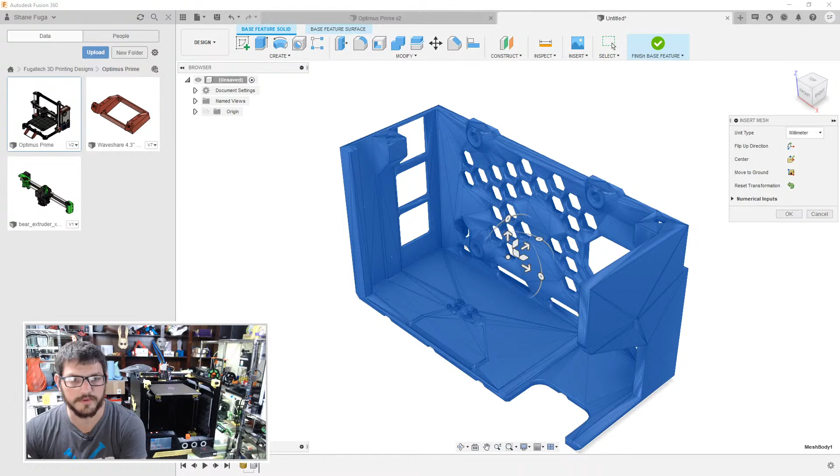So we'll go here, we're gonna move me, like that, there we go. See if we can get these imported properly. I'm kind of going to assemble them, and then I'm able to pull them into my master model. So for looks and things like that, we're going to have to clean these up a little bit first. Take a few minutes to clean this stuff up.

So the one thing I do need to, the reason why I need to pull this in and clean things up is because I need to figure out how I'm going to get this to look on 2020 extrusion.

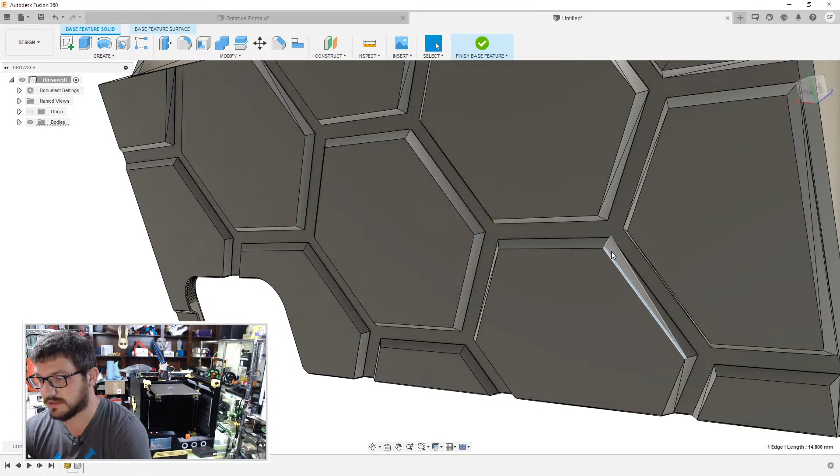Because on Mega Tron, we used a different mount that Aaron found and modified, and I was debating on using that, but I could use this as well. I don't know, I'm going to clean it up. We'll pull it in, see how it looks. If I don't like it, then I'm going to modify the one that Aaron had originally made for Mega Tron, and we're going to add a Raspberry Pi 3B Plus mount to it.

To have everything nice and clean as possible. My appearance, go away.

The less lines we have on here in these bodies, the easier it will be to manipulate if I end up changing any of this. And also less faces means less geometry, Fusion will run faster.

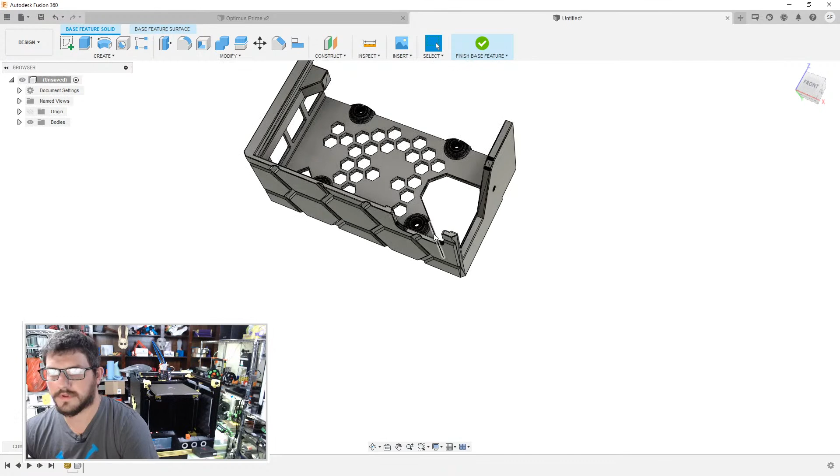Good enough for that. All right, and then we're going to go ahead and insert another mesh. And we need the, where's it at? Pi 4B cover, 3B plus cover.

It's right here. So we're going to just pull this guy, hate that. Fairly certain it sits... no, it doesn't sit there. But this is the backside there.

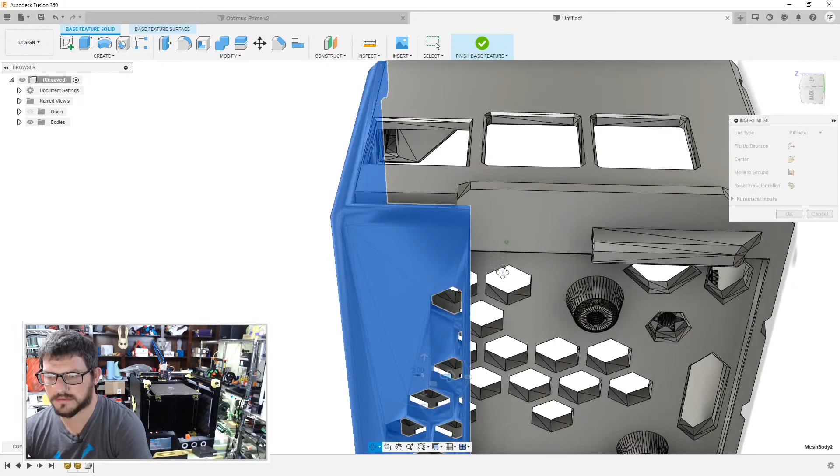That's not how that sits, is it? That can't be it. Oh, maybe that is it, because those holes match up. Match up, just like that. All right.

This, right click, mesh to BRep, going through. Clean this up real quick. Bodies. Oops, not that one. That one off, there we go.

Hey, Mike, how you doing?

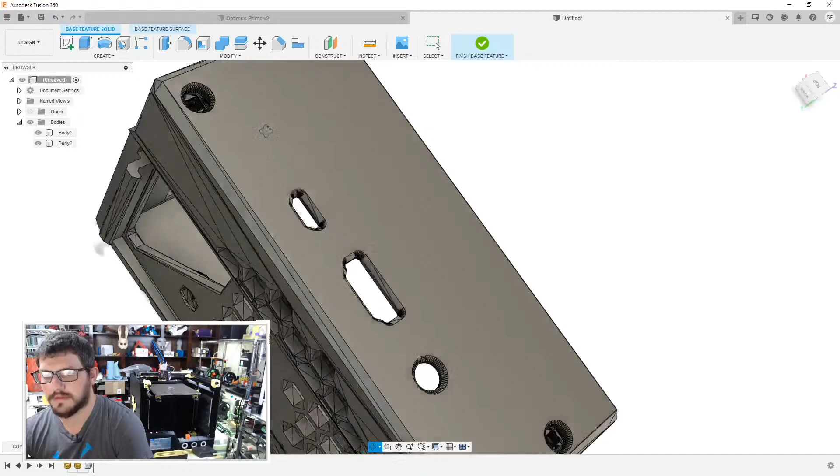Is how the bottom of that thing looks. Interesting, didn't think it would look that way.

All right, so we're going to insert another mesh, and we're going to go ahead and grab the main body now, which is the SKR body. And just rotate this 90 degrees. Get everything pretty close to lined up.

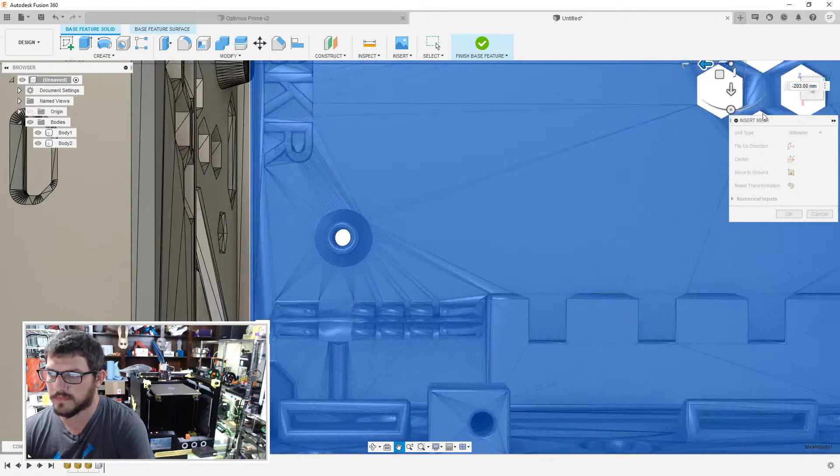Oh, there goes the other way around. 80. This way, this way, that's pretty close right there. All right, and then mesh to rep. Okay, this one might take a second.

Baloo, what's up man, how's things down under? Is this Voron related? No, this is not Voron related.

This is mainly designed for the bears, but basically I'm getting the top part from this model and I'm getting the bottom from this model because this is where the Raspberry Pis go. And they do have this bump to them. I'm not sure that I like this, but...

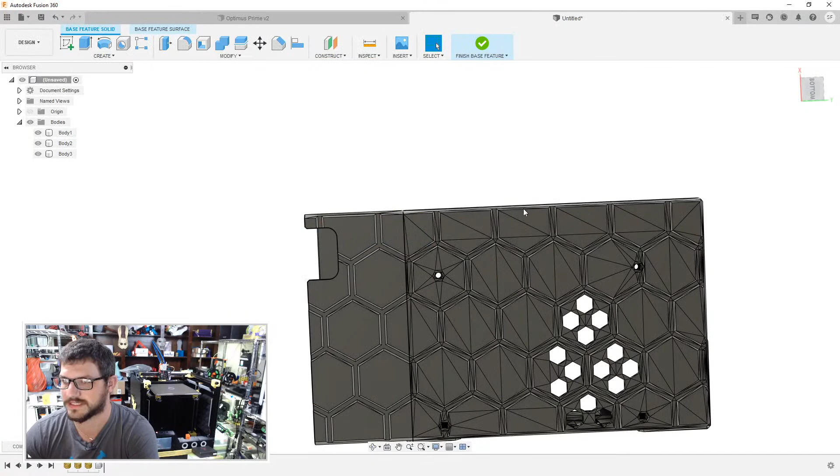We're gonna see how it looks once I get everything imported and colorized in the main model, because I'm really doing this to see, do I like the look of this bump? And I really got to shave down some of this geometry because it is chugging.

This is the problem when you're working in Fusion 360 and you do the mesh to BRep. You gotta hone down these faces a little bit because there's just so many of them. It really makes it hard to work in, and yet this is not letting me shave any of these down. This is the problem that we had with the main model

when Aaron imported it before, we couldn't really get it to behave properly. All right, well, that's fine for now.

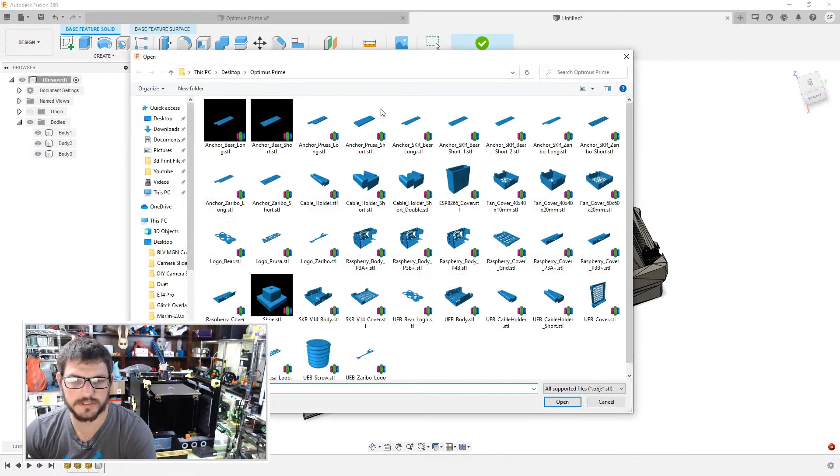So insert, we're going to do another mesh, we're going to do the cover. It's going to get rotated this way. Here, and then we're going to 180 it. Go.

For now, click mesh to BRep. Okay, yeah it is a pain, Mike, but at least I'll be able to see what I want to do here.

Again, for right now this does not need to be perfect. I just need to have an idea of what things are going to work.

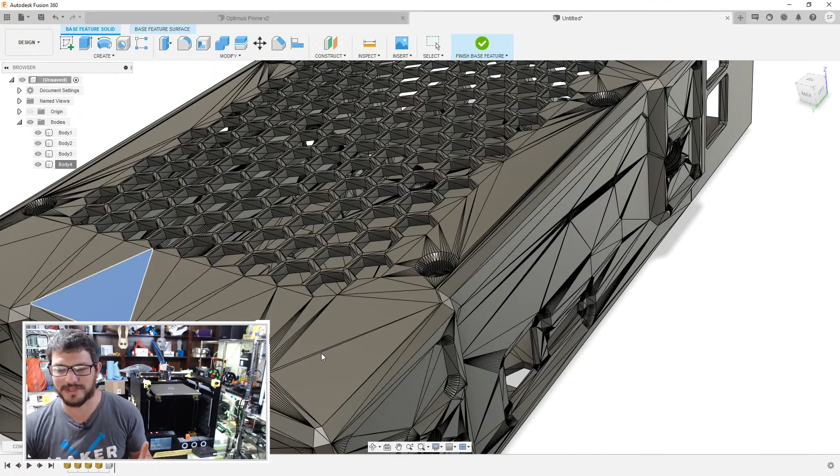So Mike, we were actually talking about this today in the Discord. I think it was Ryan who complained about it. But yeah, it would be nice if I get it, but I also agree with people that when you design something and release the STL, it's free to you. So your ability to complain about it is pretty minimal since you didn't design it and it was free to you. I get that part. But I also get that it'd be really nice to be able to modify these things easier if they would just include some step files or a Fusion 360 archive.

Sean, no, this is probably the fastest way to pull an STL in and start playing with it.

Again, I can't - the main body of this case won't let me delete the faces of it, but this top half of the case is letting me do so. Oh yeah, see right here, it's not going to let me do that.

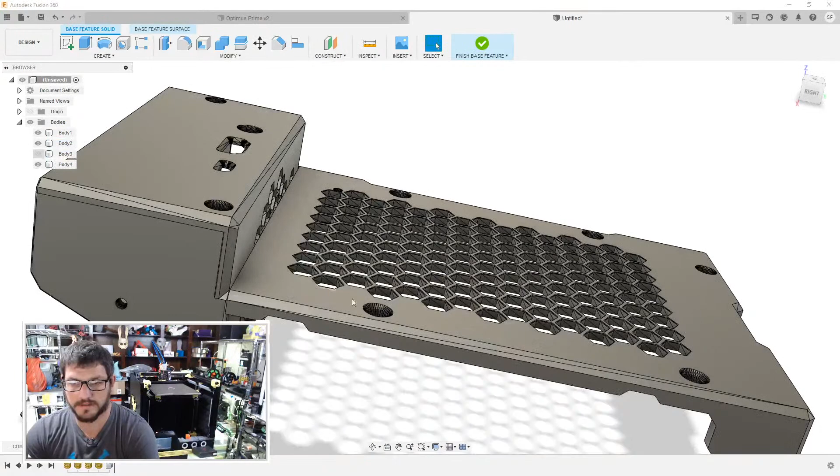I'm still doing all of this in base feature, because otherwise you're going to just pollute your timeline like crazy with all these delete faces. You can remove it from the timeline, but it's just faster to do it here in the create base feature if you want to start playing with an STL.

Oh, that was Nom. Sorry, Ryan. That was Nom that was saying that in the Discord. You're just my scapegoat. Sorry, buddy.

But yes, I get it. It would be nice if people release step files for something that's free, so it's easier to modify. But again, it's free.

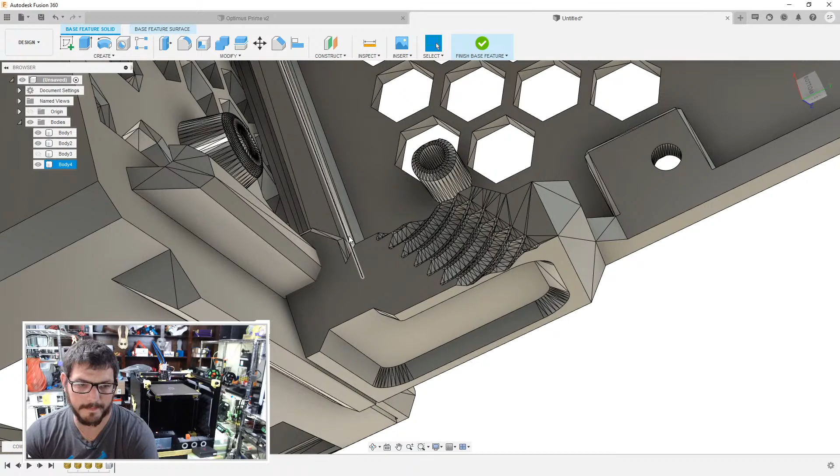Yeah, I mean that is true. Because basically if you're releasing it as open source, releasing the step or Fusion 360 file is kind of like your source code. Like with Marlin open source, you have to have the source code for it to meet the open source license, so I get that. I do agree with that. I guess that is a good point - if you're going to release it with an open source license, you should release it with the proper files to support it. I get that.

Okay, we're just cleaning this up a little bit. This model won't clean up at all. When I try to do a delete face, it won't whatsoever.

Like I said, I know we had this problem when we designed Ultra Magnus using the same case. But that's okay, so we're just going to go ahead and save this as SKR case plus Pi 3B plus.

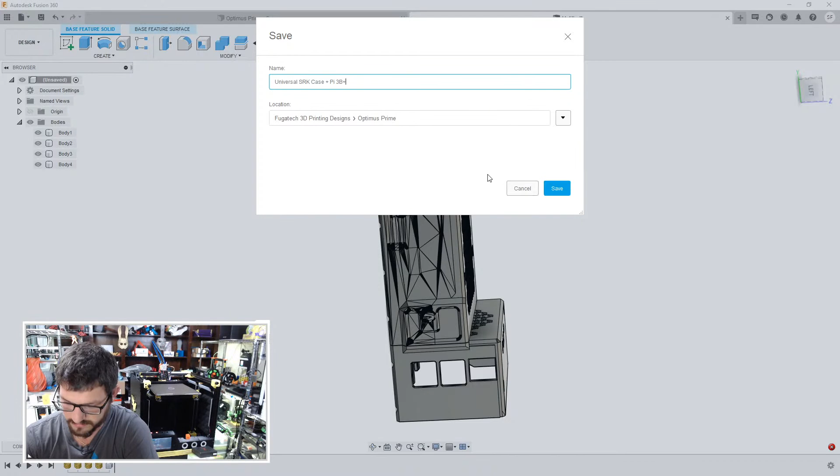Save, and then we'll colorize this real quick, which is going to be really hard because of all the faces. I wanted to be able to colorize this face in here, but that's just not going to happen if I can't delete these faces, because I do want to do dual color on it.

We finished base feature. Decide what we're gonna do here. So I think all red is gonna be not the greatest looking out there, so kind of got to think what would look good. So here's what Optimus Prime looks like right now.

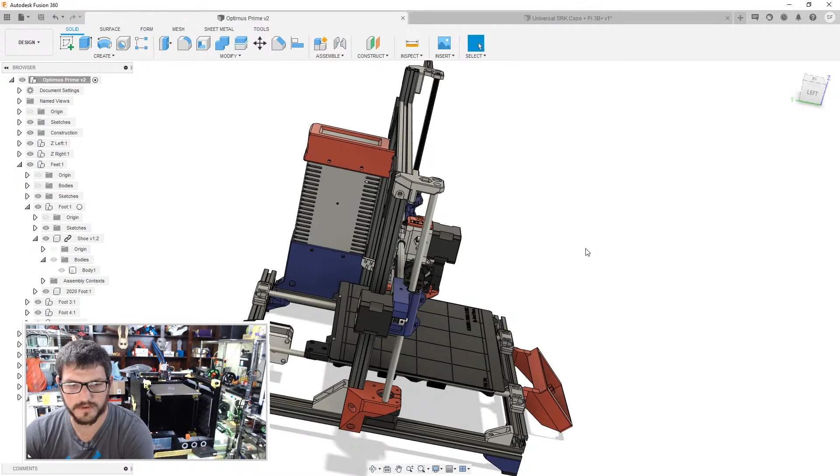And we're going to pull the case in. I don't actually know if this is going to work out that well anyway, because this comes down flat. And I mean there is a cutout there, but I don't know if that's going to be enough to meet.

Well, let's go ahead and just save this again. Let's go into Optimus Prime, pull this in and see what it looks like, and then we can kind of play with colors from there.

As I said last night, it is so fantastic to be able to do your colors in Fusion before you print anything. I'm a very visual person - I have to see a visual representation of what I'm going to be printing before I actually print it, because I need to know what files to grab. I have several instances of Prusa Slicer open here with a lot of different files that I am preparing to print on several different printers, so I need that visual representation for myself.

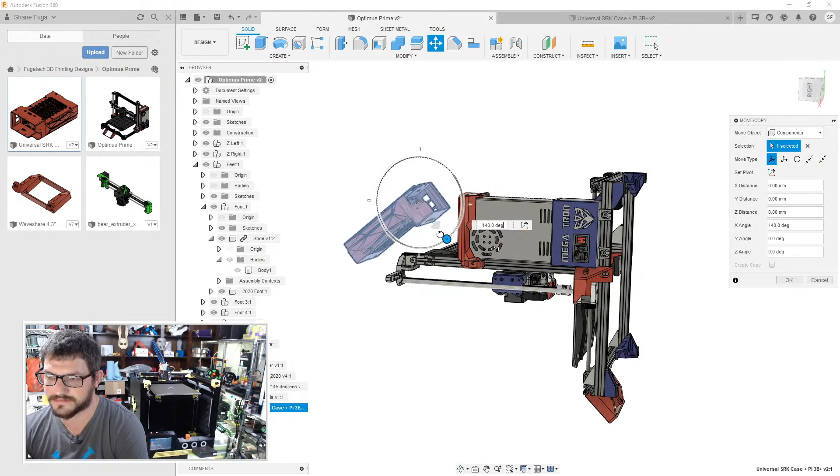Be this way. Forward a little bit. Up, once we get it generally in the right place. Again, I don't even know if this is going to really fit in this spot properly.

Let's hit OK, so we're going to go back in here. We're going to highlight all of this, and we're going to create a rigid joint because I want all these parts to move together.

Hey, Dad's here. How you doing? See you, Baloo.

So, assemble, I'm just going to do a rigid group. We got to make it all components. So, come on.

Hey, Viking, how you doing?

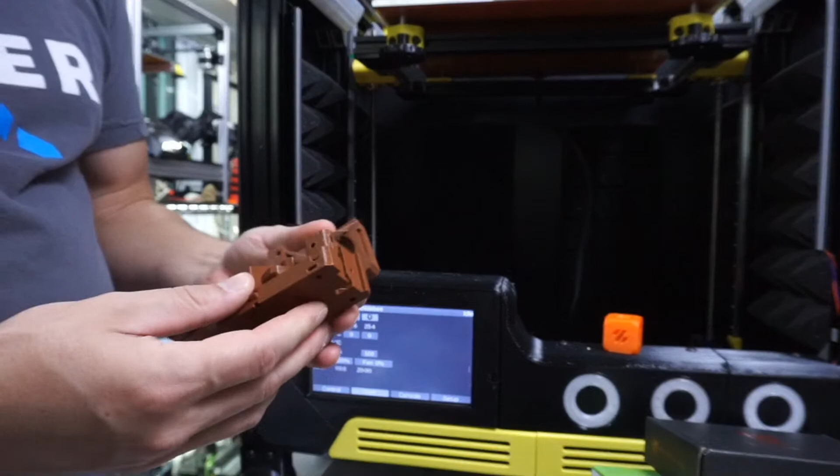Because I'm going to print this in PETG eventually, but this is going to go on Optimus. Sean's asking, so Optimus is a scratch build 2020, basically a bear, but it's all 2020, and it's a scratch build. Designed a bunch of the parts with Aaron, and I'm using some other parts and modifying some, but I'm going to put a Hemera on it.

So that's that project. What I'm also working on is a straight up scratch build Prusa bear running Klipper, and I'm going to put a mosquito. Now this is a Mellow mosquito knockoff.

And what I want to hear, people, this is great, this one works really well. So I'm going to use a standard version with a 0.4 millimeter hardened, I'm going to put an E3D nozzle X on it and go with there.

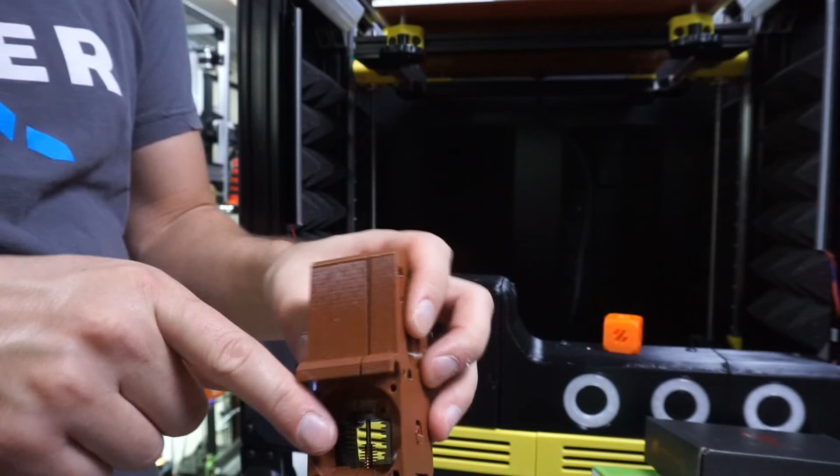So I downloaded and printed this mount, and this mount, they say works. But this, I didn't know, is version 1 of this guy's mount. And I just found version 2, and I'm printing it now. Version 1 is not great because the heater block touches underneath where the fan is, where the 4010 fan goes to pull air through and cool the heatsink in there. It hits right there.

So this is all going to get melted and deformed from that heat. And then the other issue was, what was the other issue on this? It was that, and so I downloaded, this is the Bunny and Bear. Again, this is printed with just some whatever PLA I had lying around, sitting on this is some of the spools that I made with some MakerBox ones.

If it was one more layer of black, it would have looked really cool. But I thought this one would match, and the holes do not, because this side matches just fine, but this side over here does not match, and this top here, where the filament sensor goes, does not match as well. So this is not usable for that.

So I'm hoping that the next version that I'm printing out will work. And again, I'm using just whatever cheapo PLA I have laying around here, because right now Mega Tron is printing the Greg backplate for the BMG Mosquito - Greg's the guy that made the bear. And then the updated BMG Mosquito, the one off Thingiverse, is printing on the bear, which you guys can't see. The bear is just right beside Mega Tron, you can see the brown roll right there. And that is printing the new parts for this, and we'll see if that marries up a little bit better.

And my Mark 3S is printing parts for a friend's printer that they're going to be building with me. So, that was the other thing.

The part cooling fan, when mounted here, runs into the heater block as well. Now, granted, it has a heat sock on it, but it's still going to have issues just because of the heat transfer. Even through the silicone sock, it still gets hot enough to melt and deform PETG. So that is the issue with this.

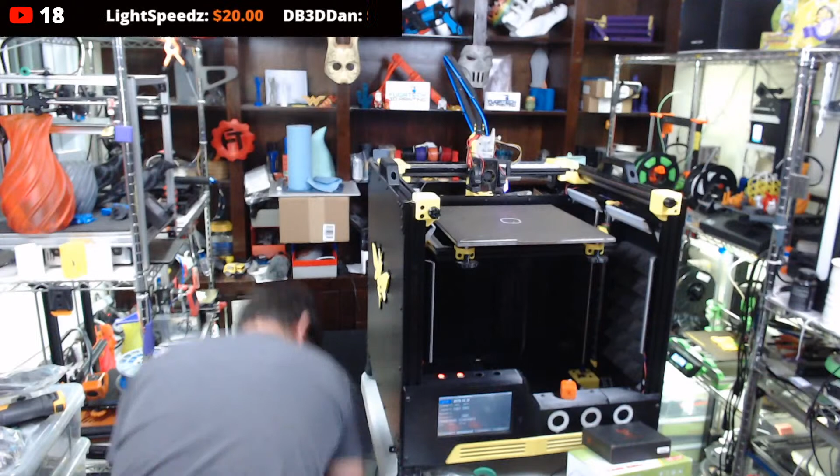So, I actually messed with Mesh Mixer for a good hour today, I guess, and I suck with it. Definitely Angus is the man when it comes to Mesh Mixer. Everything I know of Mesh Mixer, I have learned in a Maker's Muse video. It's not very intuitive to me at all.

So there's that. And this one here has the 3D printable BMG arm to put on it, and I think you can't use a standard BMG arm with this one. Yeah, this one cannot. You have to 3D print the arm for this one. But yeah, the arm goes on there, and then it just has the part cooling shroud.

So I'll have different colors on this, but again, I'm just printing this out of whatever PLA I have laying around, just to really make sure I know what I'm doing, because this kit, the Mosquito Bear, is going to be running an NZ board, running Klipper. So I'm printing everything, putting it in a box, and mailing it ahead of myself when I move.

It's probably going to be the first project I do. So I need to make sure everything fits and works now, today, when I print them, so that when I put them in the box and mail it, I'm good, because I'm not going to have a functional 3D printer, I think. That is why I'm messing with this and trying to get everything matched up perfectly, and I'm okay to waste a little bit of PLA to make this all work.

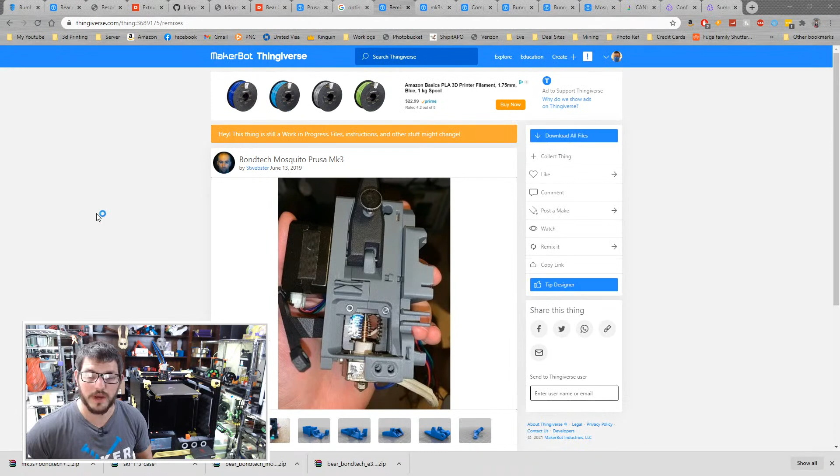So me trying to get through this has just been brutal. I sent him a message asking for the source files. I also asked if he could do the same thing with this, his SKR version of it. And I was like, man, if you could do a Raspberry Pi sandwich on top of this one as well, that'd be super cool, let me know if you can do that. But we'll see what ends up happening.

Fusion is, all right, we're going to kill Fusion because I am tired of waiting.

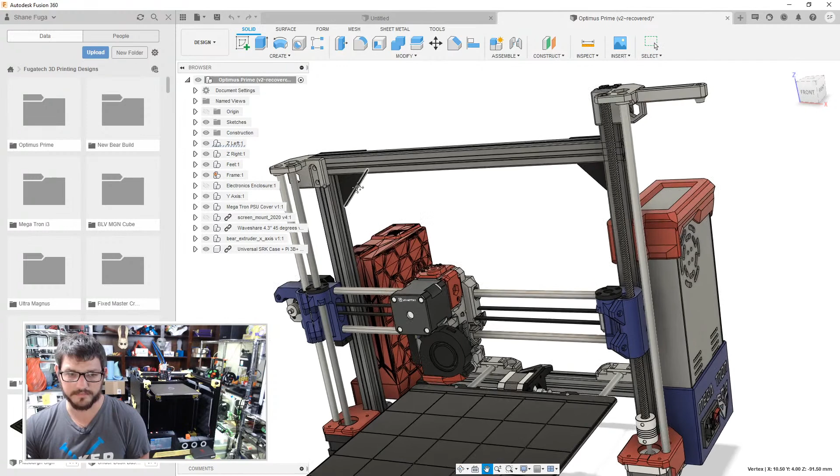So on here, right here, so this part right here is a part that Aaron and I made. So this is, he created the corner bracket, I created the reverse Bowden, so I made that myself. If you want this one, you can go to the,

look at one of my previous streams, you'll find for Mega Tron, you'll find the download link for that file. Although this is version 1, and we didn't realize that these X carriages crash into those here. So version 2, this is on the backside, and I have not updated the listing yet for that.

There's also, it just goes in with an M4. It just goes right here to the V slot, that's reverse Bowden to it. You can just attach to any printer pretty much. I just like it being integrated because I'm fancy.

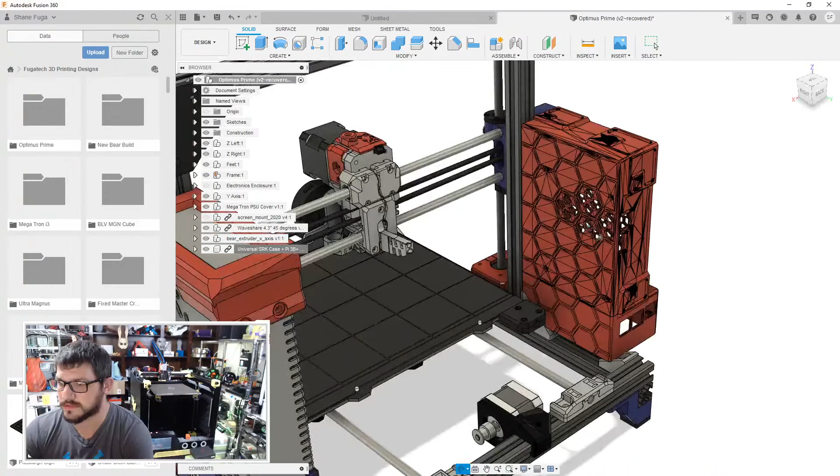So, all right, so we're going to go ahead and move this. Actually, let's just go ahead and see if we can align this face. That moves the whole thing. Okay, cool, so that's aligned there.

Now we need to align this face. No, not like that. We need to align this face with this face. Okay. So that is not going to work out at all. So I need to figure out, let's go into here.

That's what I need to do. So we need to move this out. So let's do like that. Okay, so let's align, see if I can figure this out. This is going to be a little bit trippy to get into. So I want to align.

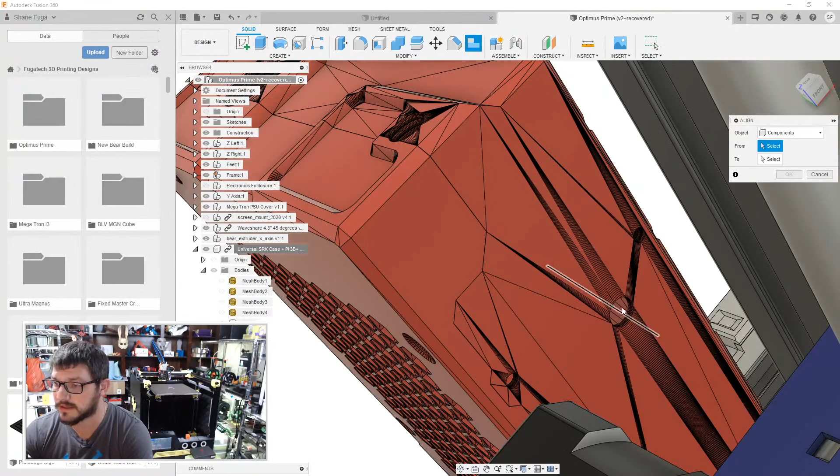Just pick a line that looks to be in line with that. So we're going to pick this here with... there. Cancel that, it's not on the right face. So let's try this again. Align.

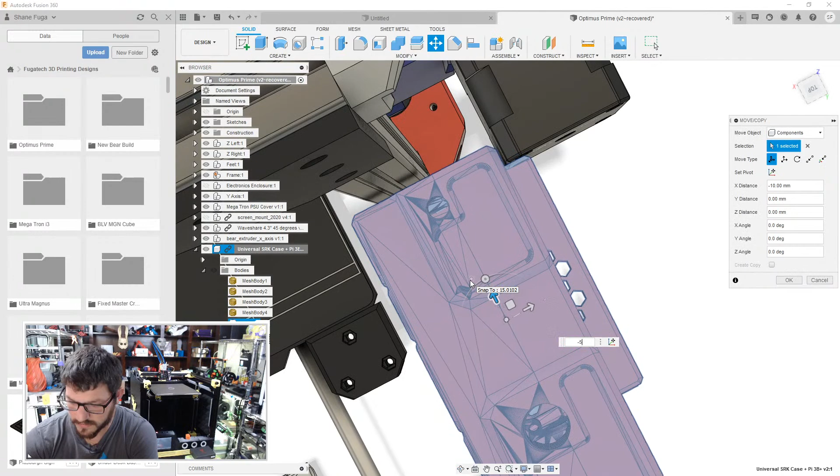That looks pretty close, that with that there. And flip this. Okay, so all right, like that. There we go.

Now we got to see if this clears the motor, which it like barely does. Fix right there, so that's with the hole lined up roughly to there. And that motor, I mean, it does not get any closer than that. We're looking at like millimeters. What is that? I mean, this face and this face. 1.19 millimeters. Gosh, that's close.

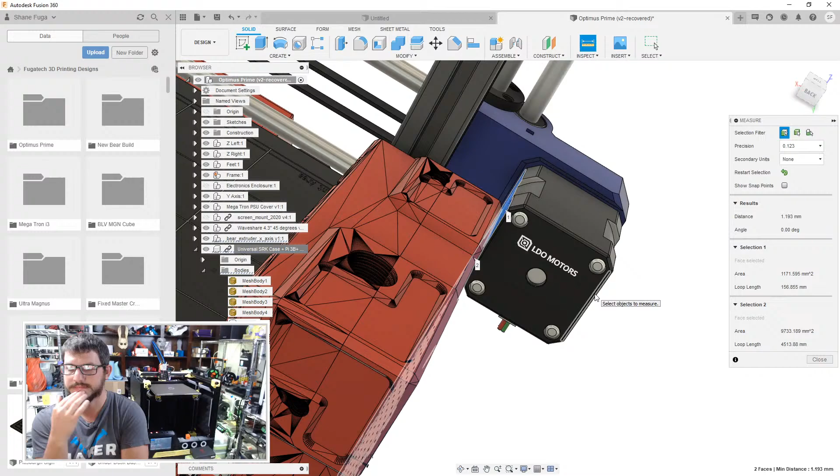This might not work out. This case might not work out. Which is why I'm doing this now, because I would hate to waste all the filament on this case to put it on to build the machine for this motor to crash into it.

That's real close, real close. Down the bottom is fine. It's not even, I just gotta move it up. Move this up now.

The other problem is that this here collides with it. That's no bueno. And then my bracket there collides with it as well. So I don't think this is going to be a viable option for this configuration, this build.

Okay, so now we know. So what we're going to do is we're going to go into, where are we at here? Mega Tron. Let's find electronics enclosure. I know this will work because Aaron made this super awesome mount for it. Let me find where this is at.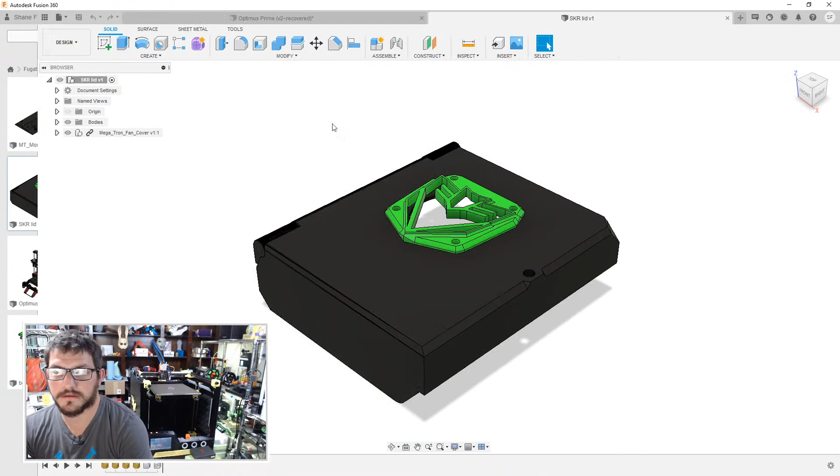There it is, copy this over to Optimus. And then let's find that other mount. And then we can get all this together here. Now, what this does is this brings it away from the frame and over, and it clears the motor. Because I already know it's able to clear the motor. Copy this to Optimus Prime. Copy. All right, let's go into Optimus folder now.

I wish there was like a preview on these folders. That would be super cool. All right, so we're going to go ahead and edit this one first. And what I need to do is, which I might end up cheating on this a little bit.

Okay, so here, I want to put the Pi right here, right there in the bottom. That's where I want to put the Pi. So I think we're going to go online and try and find a... wait, I have one. In this.

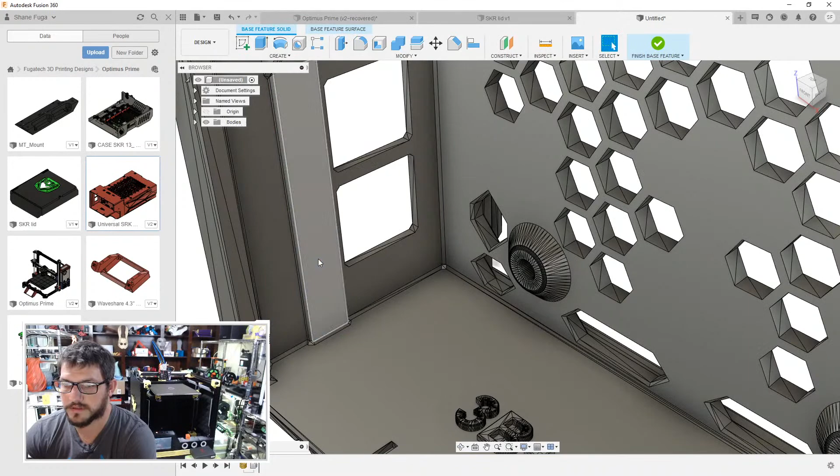It's going to be hecka slow to work on, so we're just gonna do a new quick one real quick. I just need to insert mesh, 3B plus, okay. Mesh to grab, blah blah blah. Yep, I just need to get these mounting holes.

It's up real quick, the other model is just going to take way too long to open. And I just need something clean to work off of. I mean, I want to clean up these. I'm going to create a plane. And we're going to pull those geometry through. It's just easier when the plane is a little cleaner.

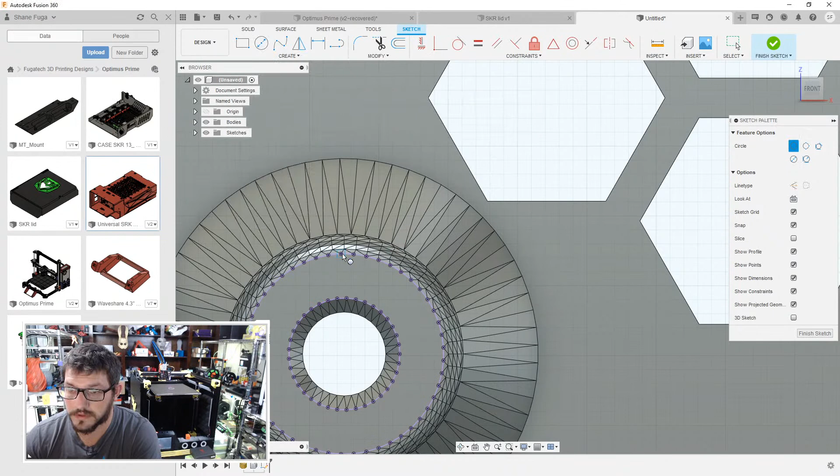So we're going to go ahead and finish the base feature. Which version of Fusion 360 do I use? I use the only version of Fusion 360. Okay, so we're going to create a rectangle. It's a little bit bigger than that.

And then we're going to do P for project. We're going to project all of these. And then we're going to go ahead and grid this out. We're just going to do for circle, we're going to do a 2-point circle from one side to do it that way. Circle, go from here to here, and that is...

Create a center point circle. Off. Redo project, there we go. This one pulled it in without a problem. So if we do circle, 2-point circle, like that.

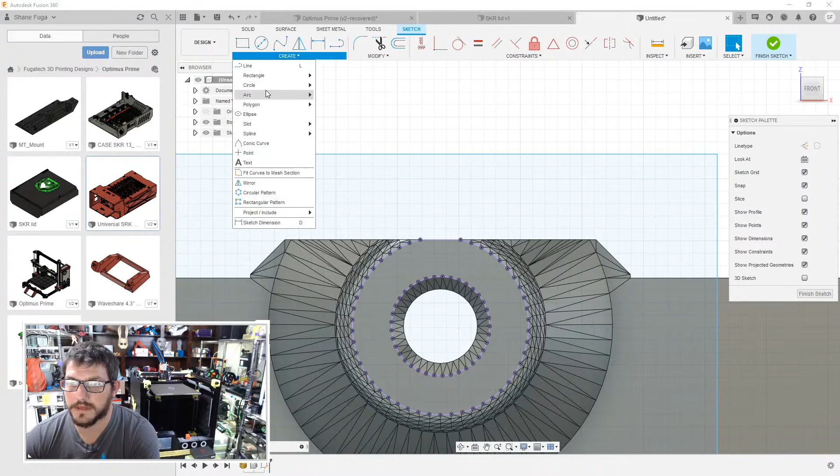Okay, that's 2.9, so this is about 3 mil. Just call it 3. Just need to do that to the rest of these. And I can get my grid. There's probably a faster way to do this. And that's cool and all, but this is what makes sense in my mind.

Circle, 2-point circle, here to there, 3 mil. Okay, so we're gonna do a line from here to here. It's 58 millimeters. Do a line from here to here. It's 49 millimeters.

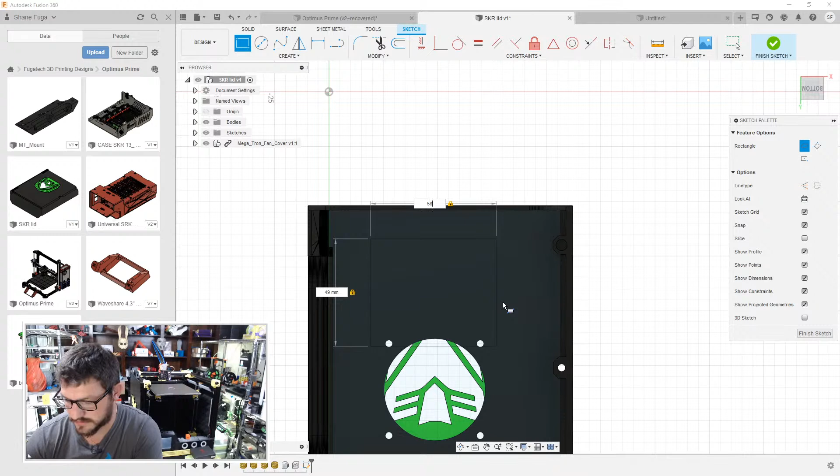So, I am using the paid version because of how much I work in this. The paid version works out for me. You can do all of this in the free version, you just have to do it all in one project, which makes it chug a little more. Right now for this one I have 7 of my 10 projects, and the free version has a max of 10 active ones. So basically once I do all this in here, I can right click and archive somehow, and then continue making projects.

So 58 by 49 is my grid. We're going to go onto here, create a sketch. I don't want a circle, I want a rectangle. 49, 58.

Okay, going to see where about we can get this to fit, because that's only the screw pattern, it's not much bigger than that. If we look up something here, let's do images. We take a look here. There's not much extra outside those holes.

Yeah, if you need Ultimate, you get more with the paid version with CAM and things like that, but none of that is stuff that I use. I just don't want to worry about the document limit, and for me it's worth it because I do videos. Do I make the $100,000 they say you need for the paid version? No, not at all. But I don't want to worry about the document limit. Also, Aaron and I, with the paid version, have a collaborative team project that we put projects in, so when we work on stuff together we can both modify common documents, common projects. I like that a lot better.

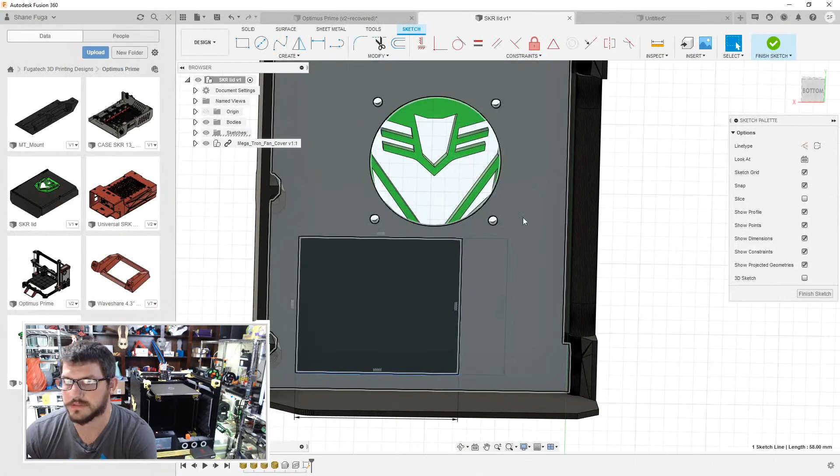But we need right there, and we need to scale it down now. Figure out how we're going to get this to match up properly. So that's scaled down a little too much. There, let's do 0.99... nine five. No, don't do that. Dang it.

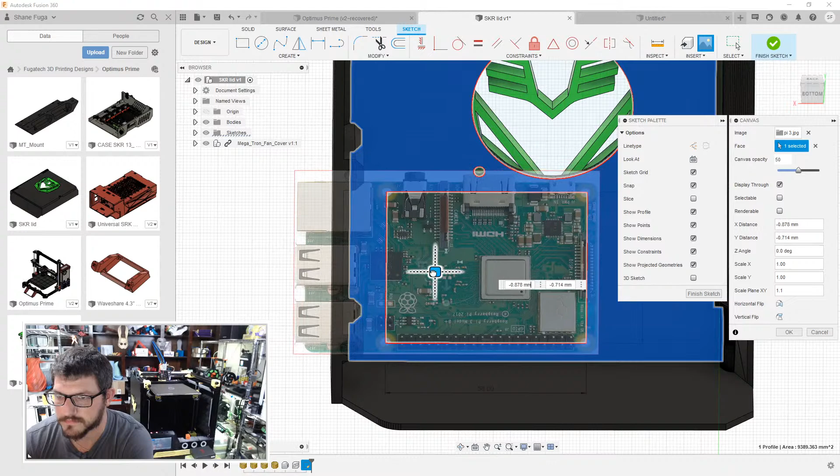Why do you jump down so much?

That's pretty close right there. Okay, so now I want to pull it back this way. See where we are. Well, that's not going to work out, we're going to have to move the fan here. I know I can SSH into it, but this is just in case I need or want to hook up something into the USB, like a camera, I need to be able to access it.

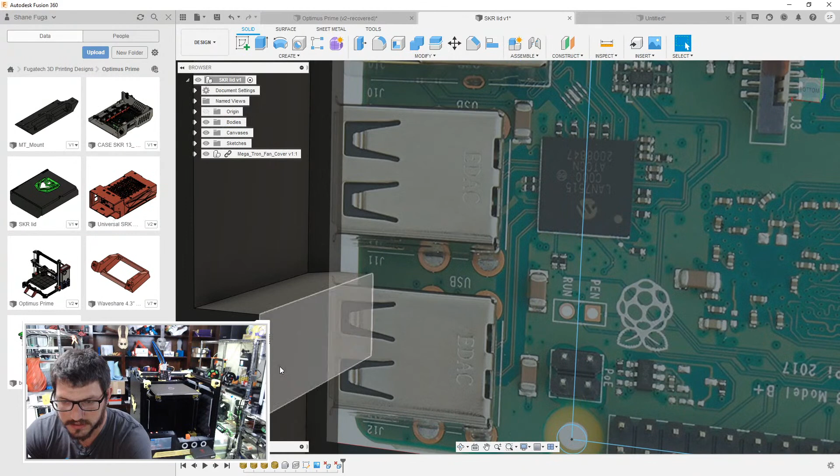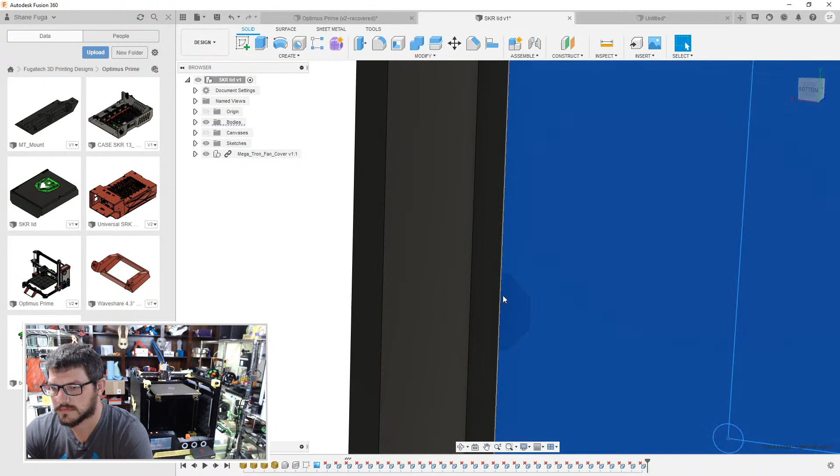So I could just extrude this to here, cut it, and then extrude this to here. No, it's not going to work out. So many faces. Quick delete, quick delete, quick delete, quick delete. There we go, that's out of the way now. And then what's down here? Let me hide the canvas.

That's fine, so now I need to figure out what that side looks like. So for that, we're going to go right to this face, and we're just going to copy this. We're going to do a sketch on this face. Project it.

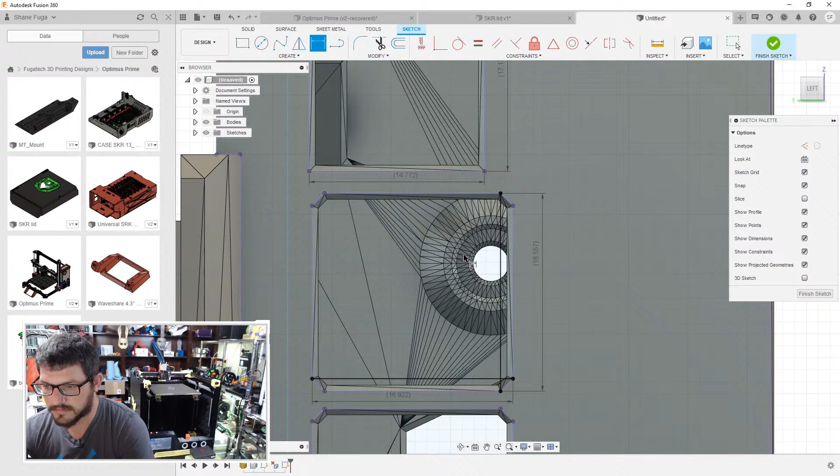Okay, just going to look at our dimensions. So this is 17 by 14 and change. Let's just do a line here to here, here to here. Dimension this out. 16.5 by 17.

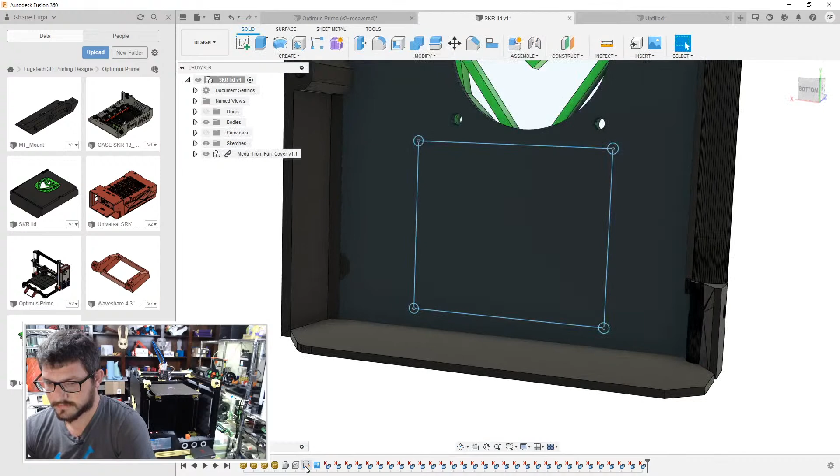And then we'll do a line from here to here. Dimension this out. Those are 1.5 mils separate from each other. And then let's look at, from this plane to this plane, is 5.3 millimeters. And then same thing here, we're going to inspect from this plane to this plane. .3.

Okay, so let's go ahead and make some 5 millimeter standoffs on here. Whoops. 5 millimeters. 5 millimeters. We're going to go ahead and extrude. Actually, wait, I want to go back to this. Construction lines, that'll make it easier. Extrude these guys. 3 millimeters up. Okay, just see that sketch.

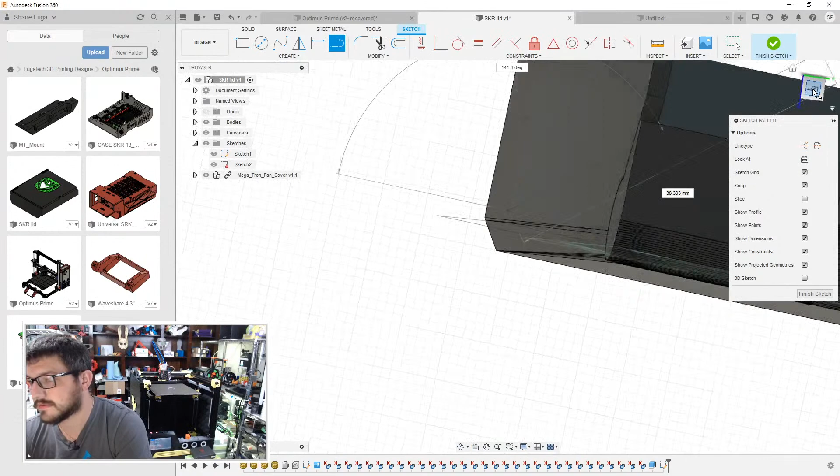And canvas. And then we're going to be going on this face in here. First thing we have to do is figure out how low that is. A little bit, 4.5 to there. And then to here.

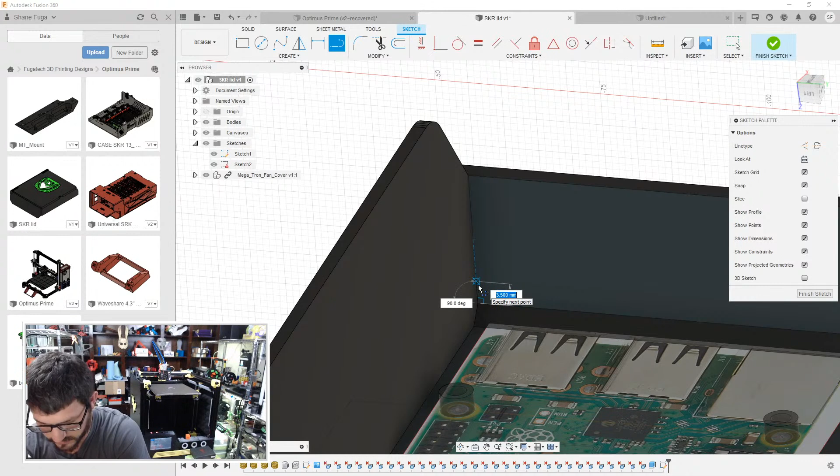2.5 millimeters. 2.5 mil down. Sweet, that's easy. Okay, so that's 2.5. We said this is, I think we said this is what, 5.3? Inspect from here to here. 5.3 millimeters. So that's 2.5. So we're going to make sure my math is right here. 5.3 minus 2.5 would be 2.8. Okay, so we're going to go up 2.8 millimeters.

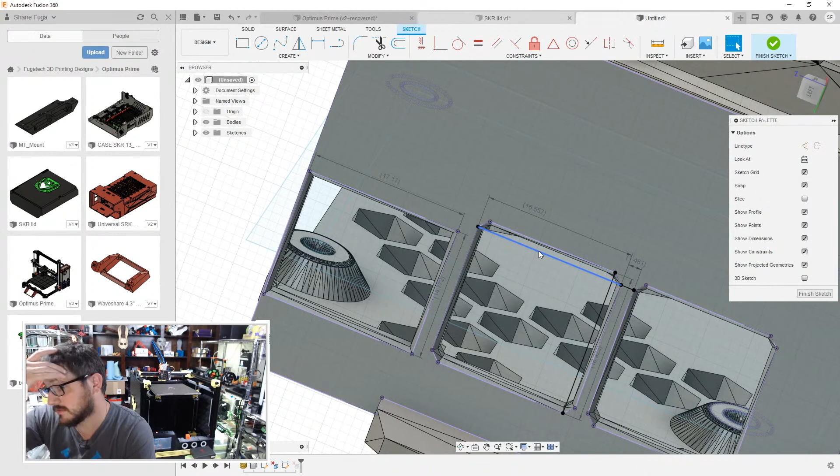We're going to draw a line across here. This is just going to be a construction line for us, so is that one. Okay, so now we have a starting point of where we're going to be at here. So, okay, let's see, we go up to this corner, no, the left corner right here. These, they are 17 mil, we'll do 16.5 by 16.5.

We'll do a rectangle up here, 16.5 by 16.5. Over 1.5 millimeters, it's 1.4 technically. 1.4. Rectangle from here, it's going to be 16.5 by 16.5.

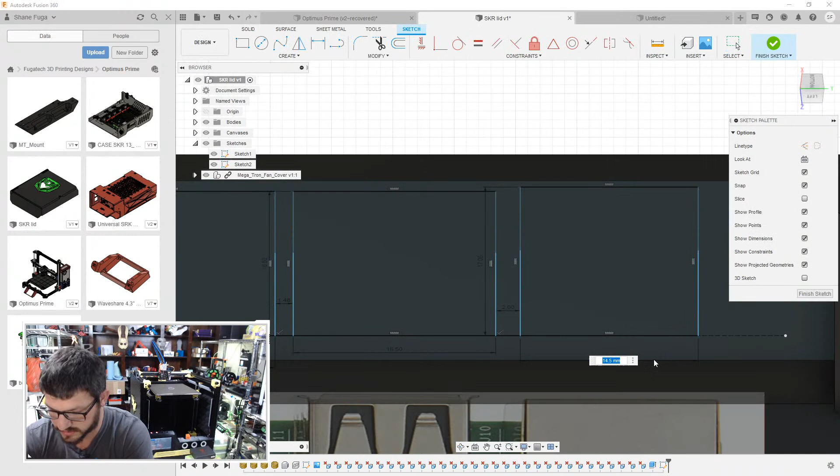And then, oh, I didn't look, what's the distance between this line? No. Inspect. From this line to this line, 1.8 millimeters. We can call that 2. And that square is 17 wide by 14.5 high. So 17 high by 14.5.

No, it's 14 by 17. Whoops. This is 17, and this is only 14 for that. Yeah, that's up pretty good, that's not too shabby, lines up pretty good. If we just extrude all 3 of these out, that should be our basic shape.

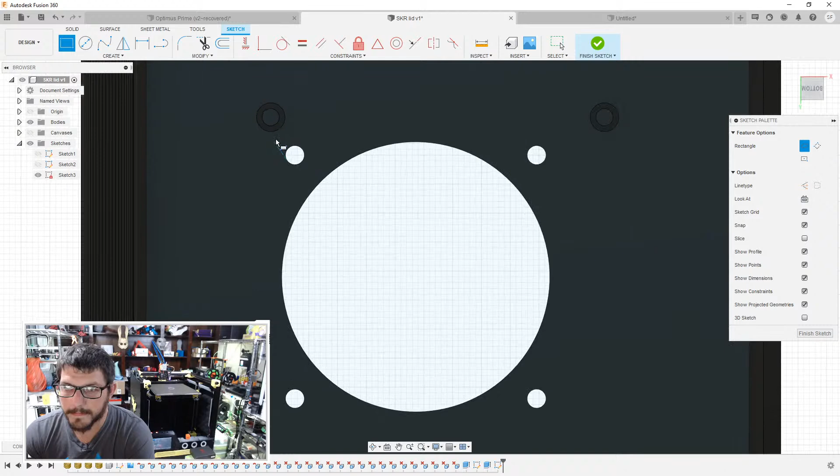We're just going to delete that out, we don't need that. But we are going to need to move the fan up a bit, so we can do Aaron's trick for this one here. Sketch on here.

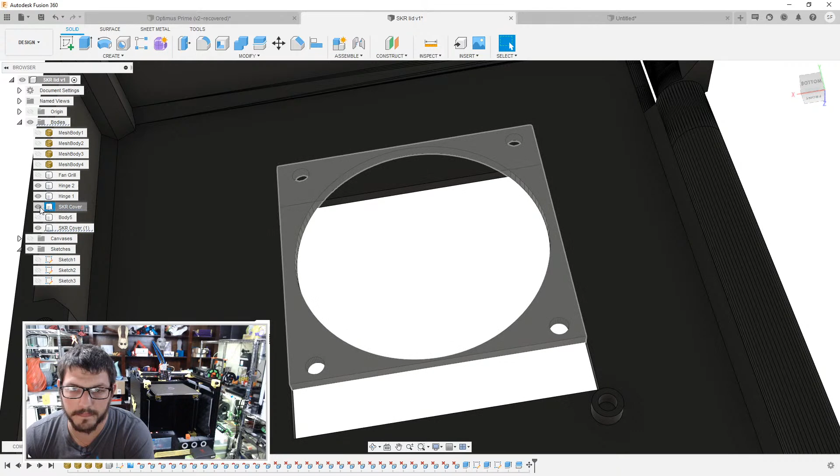Be a new body. Okay, we're going to split the body. This split with that body there. Okay, and then we can hide that one. And this we can then just move up 10 millimeters, should be enough.

So extrude this -10. Wait, gotta turn that off first. -10, turn that back on. Extrude this to here, join, and bam, bam. We moved that fan up just a smidge. So now the fan is up out of the way. I'll just need to figure out a new fan cover for it.

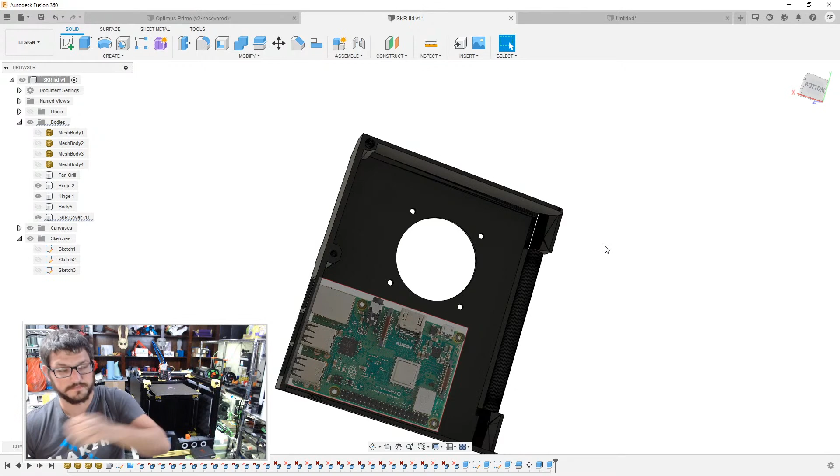I think Aaron is designing a more basic logo for the fan that will work out. So, man, the way this is now, we should be able to, because power is right here. That's the one thing. Now, I have some smaller power cables, but I could also get a 90 to put in there, but I'm probably just going to end up making my own. Or I'm going to use UART and run the Pi off of UART power directly from the SKR. Probably going to end up doing that.

But at least now we have what potentially looks like is going to be my USB and Ethernet jack there. So again, this is only for me to be able to hook up a camera to this, because if I completely enclose this in there and not have access to the ports on it, it's just kind of useless, because then I have no way to use it. Like, it's just, I have no way to interface with it.

And this goes all the way down, would be -2. Oh, okay, that's only 2 mil thick. So we're just going to have to use some short screws in this, because those are only 3 mil. So we're going to be using probably 5 or 6 mil long M3s, which is perfectly fine. This door only is going to open and close, should not be a problem at all. But yeah, so now we're going to save this.

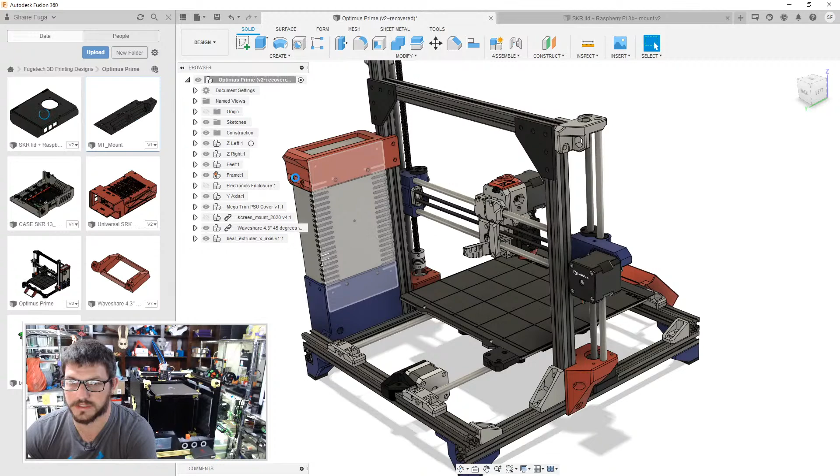We don't need this anymore, so we don't need to save that. We're going to go rename this SKR lid plus, B plus mount.

So now, save this again real quick. Go in here to Optimus, and let's go ahead and pull in these various parts. So we have, this is the mount where this thing's going to go onto. So it's going to go, how does this go? This goes this way.

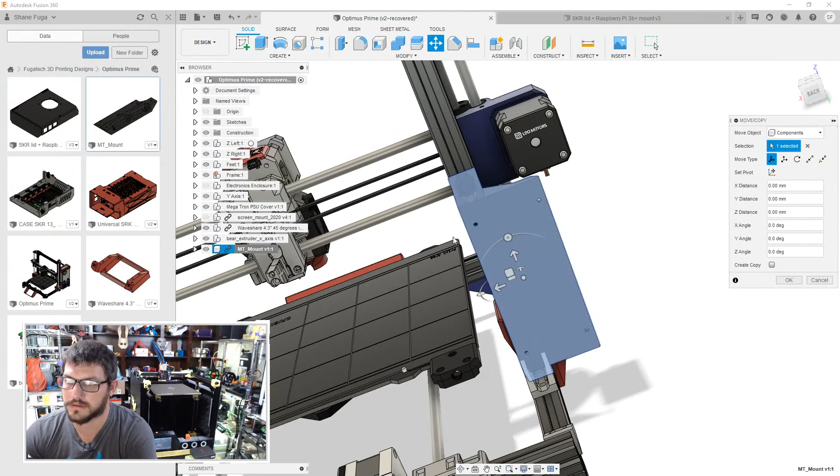Align tool to align that hole to center of this guy here, like that. Now we can just move this. It's in line there. Now we're just going to align this face to that. This face to that. And as you can see here, it clears the back of the motor.

So this is why Aaron designed it this way. So this mounts on with 2 holes there. Just gotta move it up a little bit. Right to there. And now it is out of the way. And now we can pull in this case.

Actually, I'm going to go on to GrabCAD and get a Raspberry Pi 3 and pop it on there. Make sure that actually lines up. Pi 3B plus.

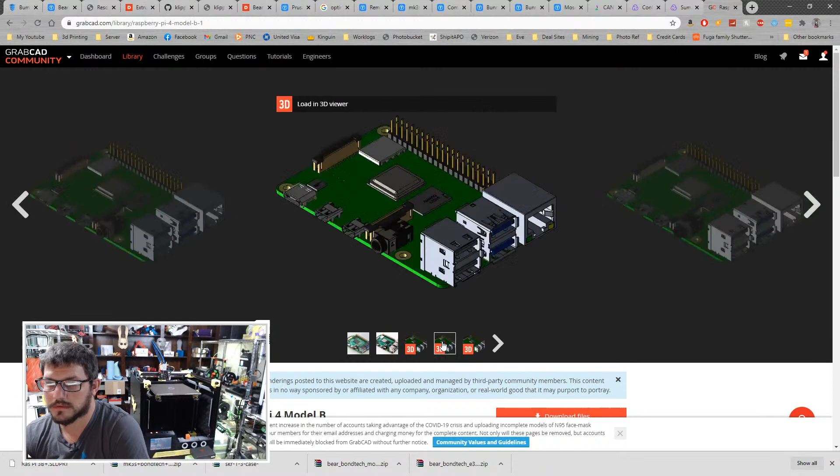Right there. So we gotta log in here real quick. The download file. It's an STL. Want a step file. Step right there. Download that one.

Oh, this is a 4. Shoot. I wonder if they have the same mounting hole. Do the 3 and 4 have the same mounting holes, Ryan? It's 3B.

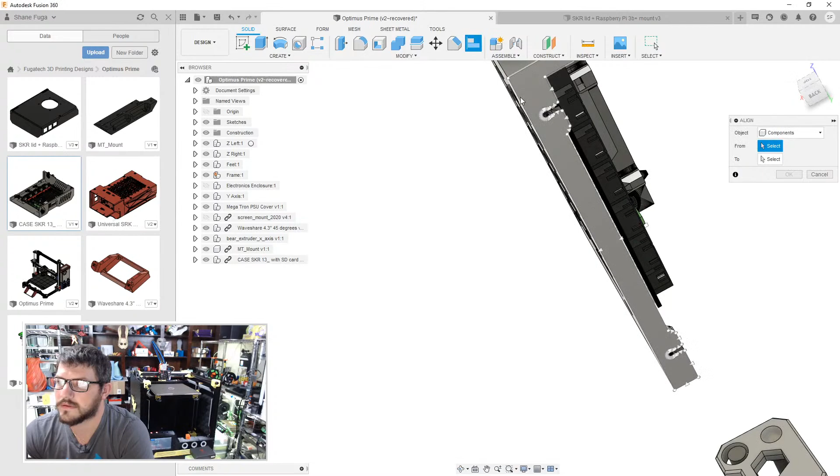SolidWorks files just don't import very well. Maybe it will. Let's try real quick. Let me put this where it belongs first, though. So we're going to rotate it this way, and then this way.

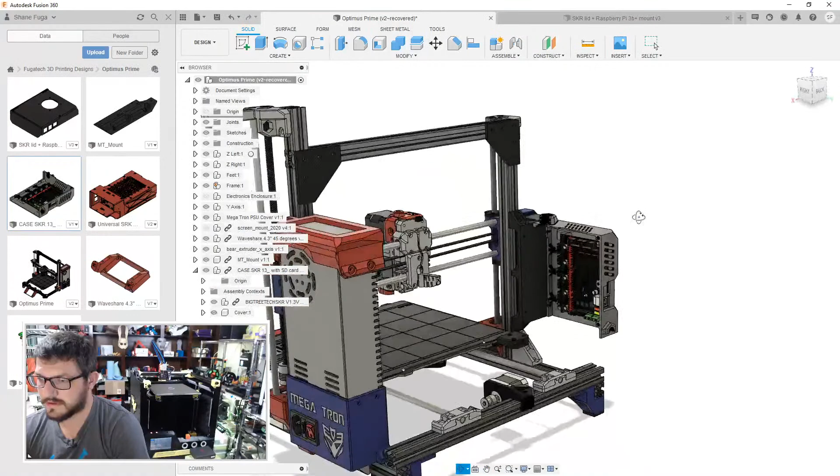We're going to line up corner with, where is it? Here it is. Yeah, like that. Okay. Oh, shoot. Where'd you group this one? Okay.

And then, yeah, okay. Now we can go ahead and do the align, that corner with that corner. Flip it. Okay. There. Now we have the SKR in there. Perfect.

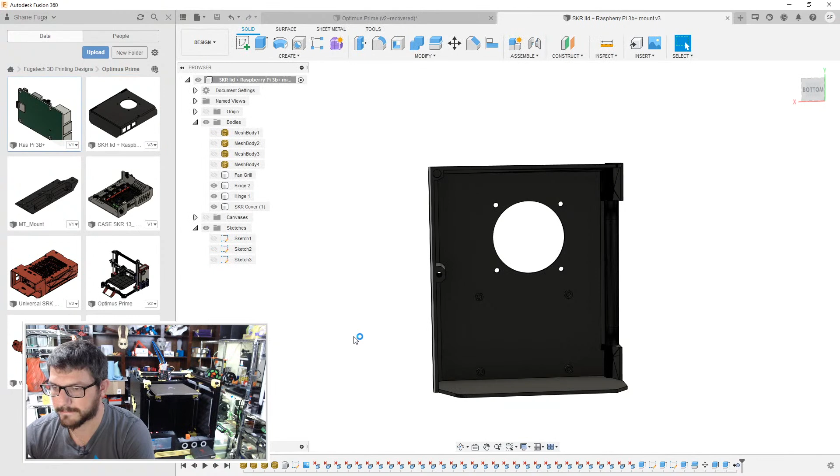Well, we'll upload that, see how it goes. And now let's import this one. Corner with that corner. Flip it. Okay, there we go.

Let's see if we can pull this into here. 58 by 49. Yeah, that's what it is right there. Rotate it. No. Move.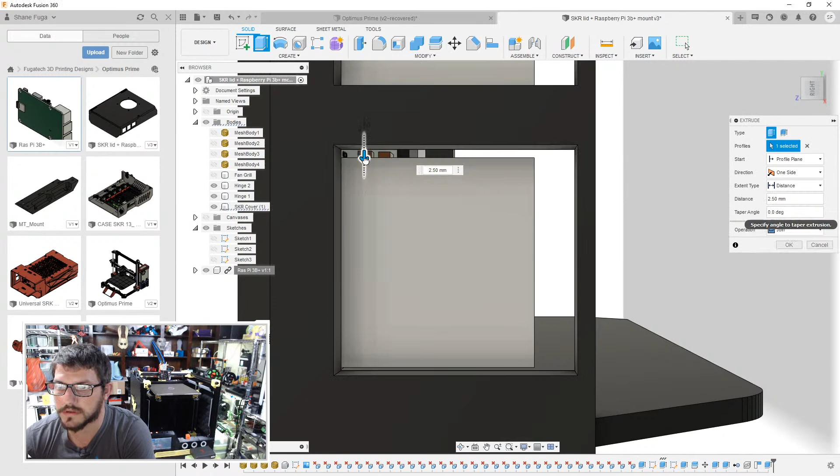To align that pole, that hole. I think I can adjust myself a little bit here. So let's do that real quick. I'm just going to extrude this.

Let's do negative 1.5. Extrude this one there. Extrude this there.

This guy. This down a fair bit. That, and then do I need to go this way down some? I do. So let's do negative 2.5. Oops. Negative 2.5.

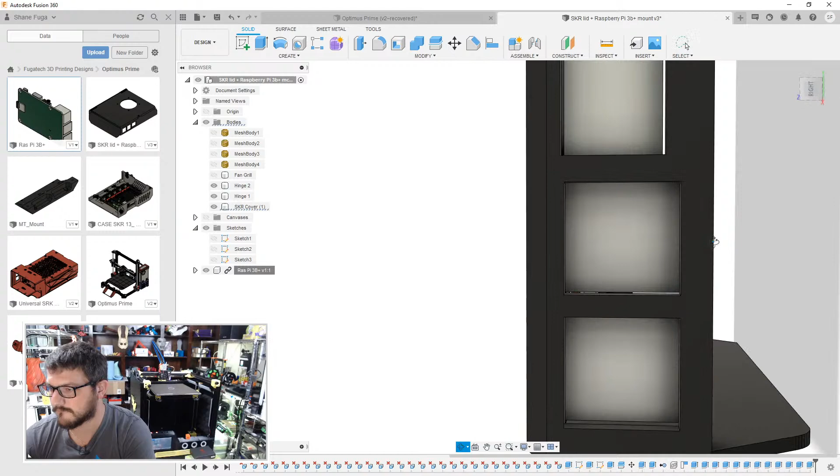Same to these guys. Here, negative 2. Now we gotta bring this here down.

Wait, oh, I did all that wrong. Hang on, let me undo all that or redo that. I lined up the wrong part of it. So let me hide this. We want to align that hole at the top of this.

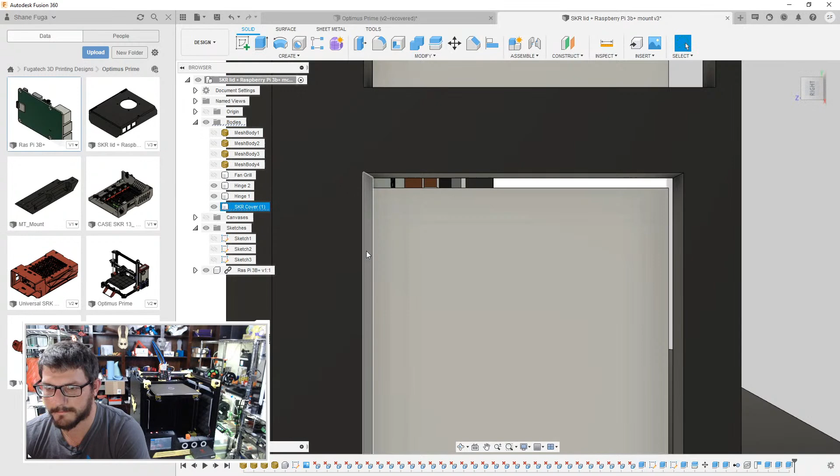Okay. Now, how close are we? We're better. Yeah, there should be enough room there, Ryan.

Again, we'll see once we do a test fit. See how it ends up going.

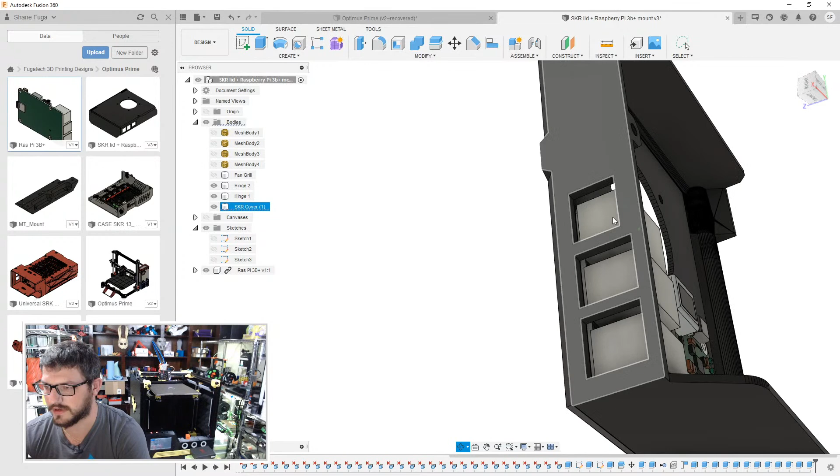Ethernet's not going to get plugged in. I mean, it's just a, hey, if I really want to do this, I can.

There. That's to the outside dimensions of those. So that should have more than enough. Because I see if we inspect from here to here, 15.5 millimeters. If I grab a normalish looking USB connector, it's 15 mil. So it's just enough.

Maybe we'll add a 0.5 mil to each of those openings. Then from here to here, I'm going to do an inspect from here to here at 16 millimeters. So we'll just...

Extrude here, negative 0.25. Extrude from here, negative 0.25. There. So that'll be good enough. Those all have the space now that they need.

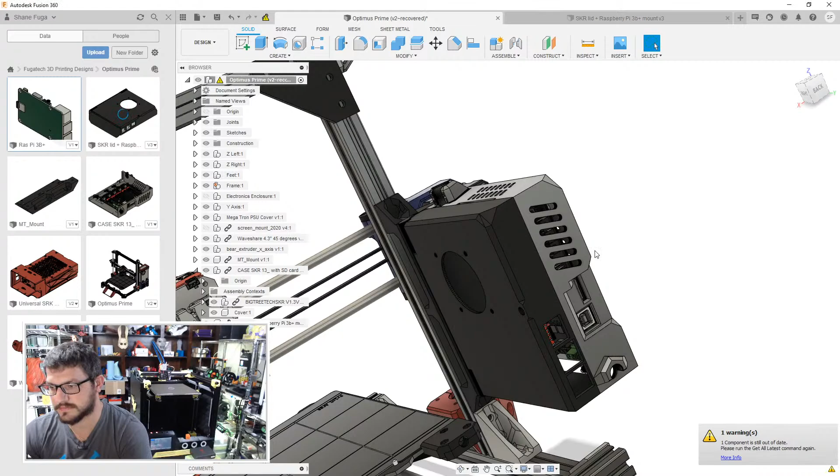Okay, so now we have the Pi in the proper place. The holes match up. Holy freaking luya. And why did I go to... Oh, yeah. So let's save this. Here, update the design. So the Pi is in there.

Update. It'll pull the Pi in. There it is. Check that out. That's pretty boss. All right, now colors.

Colors. What are we going to do here? I could do it all gray. We could do gray, red, and blue on it. Could do black. What colors to do? What colors to do?

We do, no, not search. There we are. We do.

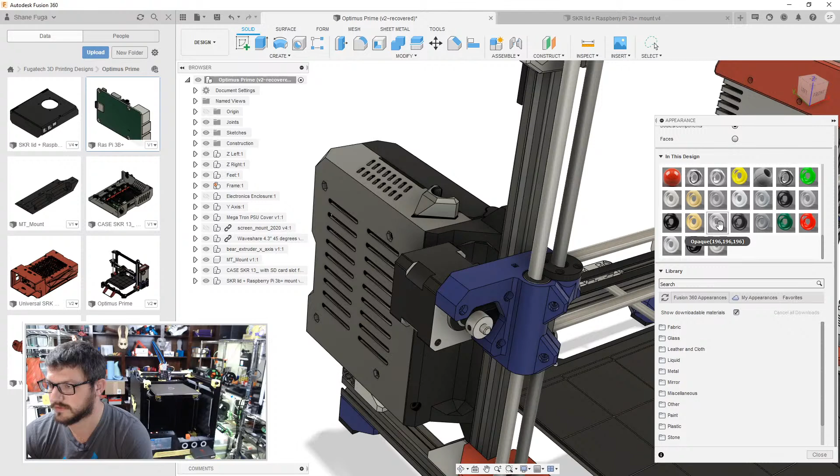Break the link on this one. That should be quick, okay. So now let's go to appearance. And we've got this.

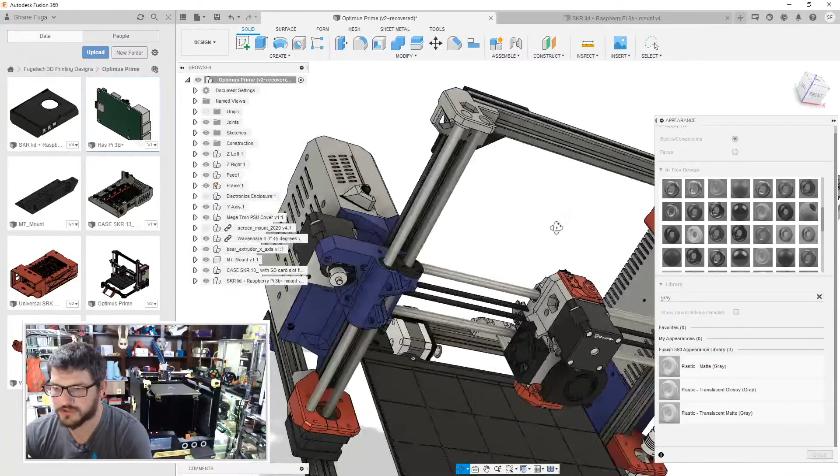Gray? No. Matte plastic gray. So we could do gray like that. And then we could do red hinges, or we could go and do the blue there, gray case, red hinges.

I just don't know if that's too much gray. But I guess it kind of matches because the power supply is gray, that's gray. We've got a little bit of blue on there. I'm trying to keep the red to a bit of a minimum. I mean, granted, Optimus does have a lot of color to him. You know, his blue feet, red top, gray, kind of middle and splashed around.

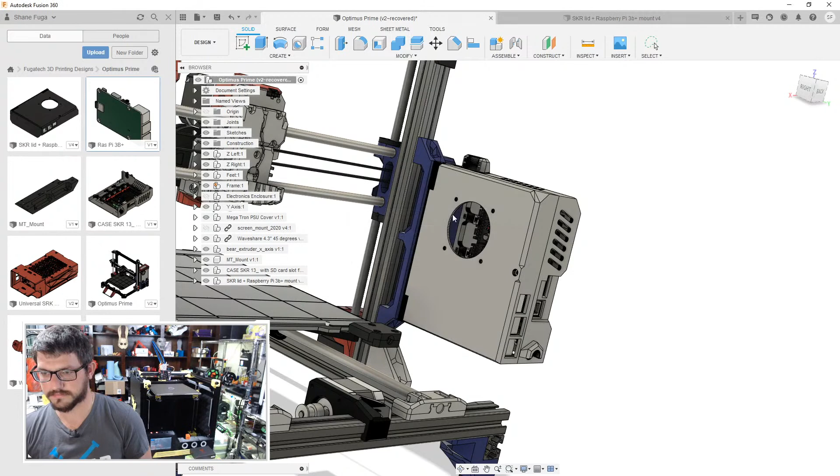And I have the tops as gray right now. I'm debating on switching them over to blue on top, making these gray. I think right now that's okay. And I still need to create the case. I don't know if I'm going to do that tonight or not. I don't think that's too bad.

What do you think? And then what we can do is we can make the logo red. That's what we can do. We can make the logo that goes on the front here, we'll make that red, the fan grill. So the fan grill will be red on top of this. That'll look slick. I think that'll look slick.

This is black here. I might change this to blue. They do have some black parts kind of mixed in there on the undercarriage here. I'm not sure if I like that. We might change these to blue instead of black.

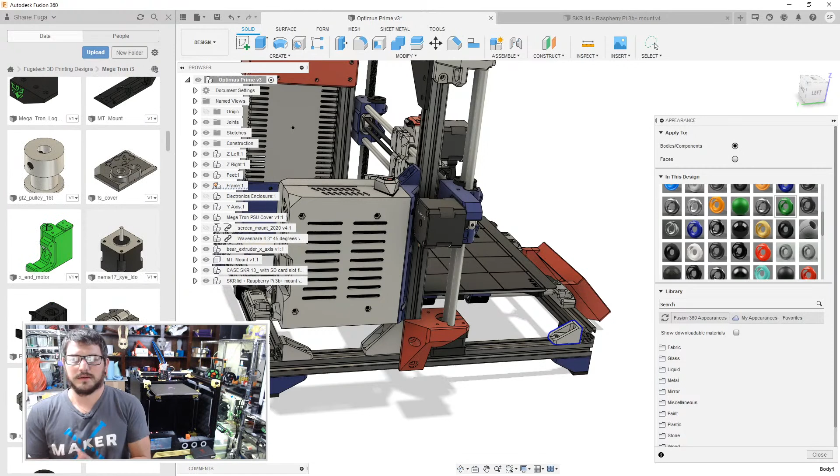I'm gonna have to ping him on that and get that sorted. I don't know why it's like that, but I think this is the colors we're gonna go with here. So I am hopefully, let's see. So that takes care of electronics.

That's cool. Why didn't that trigger? It's goofy. So one thing with the Bear is that its filament sensor is not the greatest. There, as soon as I did that, now it stops. So, all right, I'll have to figure that out later, but those parts can be done.

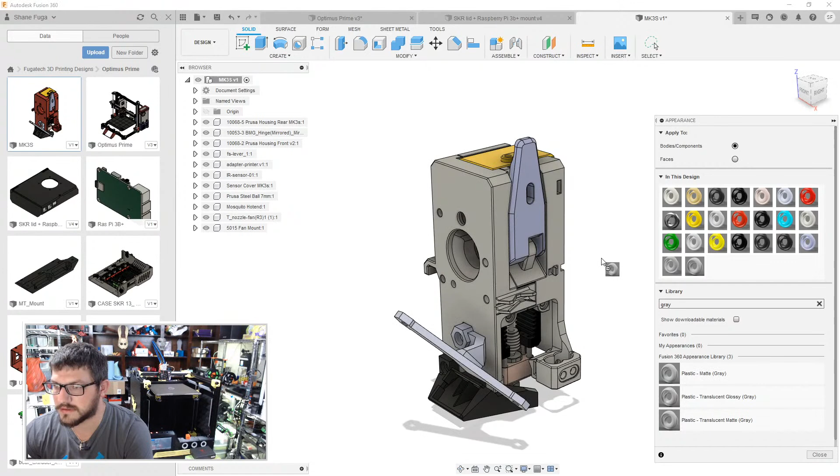Because I have to update Mega Tron, since we switched out the Z-tops, I just need to make time to do that. That might be something I do over the summer when I don't have my printers running, and go back and redo some of my documentation since I won't be so busy building. Oh, he does have it here.

Yeah, so this is it here. This is how it's going to be. The red for these guys here, but I might end up doing gray for that part too. Gray or keep it red. So that's what the extruder is going to look like once it's all complete.

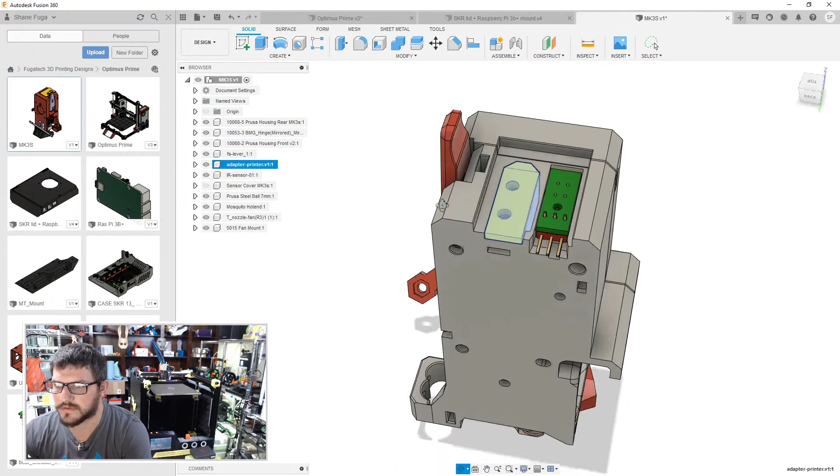Cover it, it's the adapter. All right, sensor cover, the adapter there. So we'll turn this off here. That's where that arm slides into in there.

No magnets on this one. Interesting. This is also what I needed, how to assemble it, because I don't know how to assemble this thing. So I'll definitely have to keep this on hand. I'll have to save this so I can see what it looks like, to make my life easier.

But yeah, definitely got some good designs done today. Able to figure out, I think, what the path forward is going to be for this. Hopefully I'll be able to do a little more work on this stuff tomorrow. I'll have the test prints all done off of these guys. And again, this one already finished.

Well, it kind of finished, kind of didn't. But I just need to see if the pattern matches. What did I do with the other one that I just had? The brown one that didn't match up. Oh, here it is.